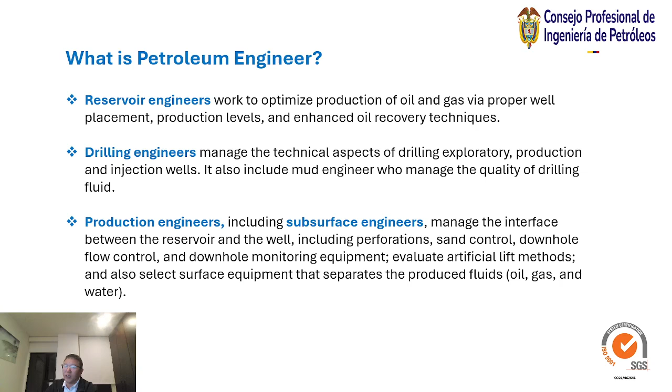So these four positions are very important for petroleum engineering: the geologist, the reservoir engineer, the drilling engineer, and the production engineer. All of this is the upstream sector for oil and gas finding, evaluation, drilling, production, and all of this.

So where does a petroleum engineer work? We can divide by employer: some people work for the government, some in oil companies, some in service companies, and support companies, and also in academia for research and others.

As for the location of these different people, some work in the office, some work on an onshore oil rig, some on an offshore oil rig, and on production platforms. We can say the field and offshore production platform. This is the location.

So what does petroleum mean? Petroleum literally means rock oil, the oil in the rock. The word comes from the Greek word petro, which means rock, and the Latin word oleum, which means oil. So we can say rock oil. And the word petro is a shortened version of petroleum. Petroleum products are all the substances made from petroleum.

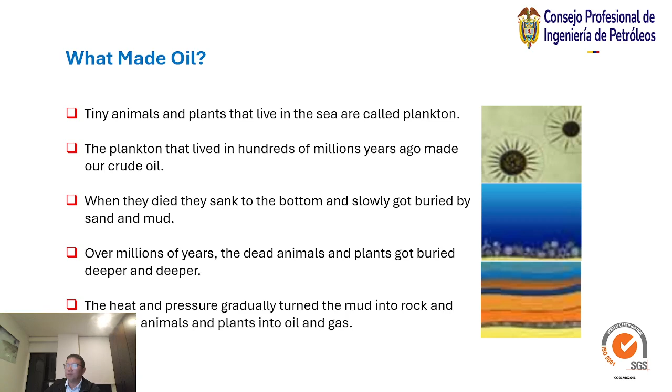So, what's the meaning of the hydrocarbons? Crude oil is a mixture of hydrocarbons. They are often chains of carbon atoms with hydrogens attached. The longer chains have higher boiling points, so they can be separated by distillation.

So what's the generation of the petroleum? Petroleum generation takes place in source rock. Remark: it takes place in source rock. The source rock may be defined as organic-rich, fine-grained sediments deposited under low-energy reducing conditions. And most commonly, petroleum source rock contains a minimum of 0.3 to 0.5% by weight of organic matter.

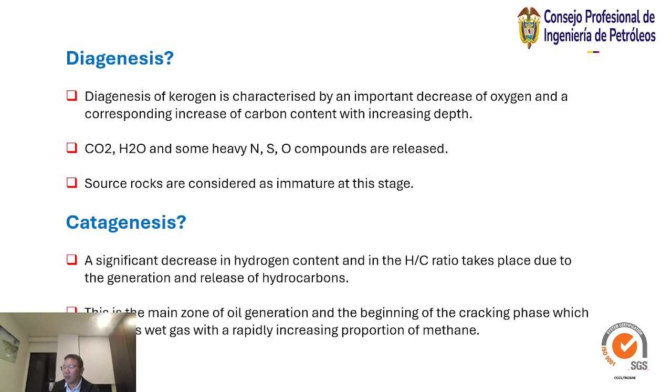The next stage is catagenesis. In catagenesis, a significant decrease in hydrogen content and in the H/C ratio takes place due to the generation and release of hydrocarbons. This is the main zone of oil generation and the beginning of the cracking phase, which produces wet gas with a rapidly increasing proportion of methane gas.

And the third stage is metagenesis. It begins at a temperature exceeding 175 degrees. During this stage, a rearrangement of aromatic sheets occurs, and the stacks of aromatic layers previously distributed at random in kerogen now gather to form larger clusters. At this stage, only dry gas is generated.

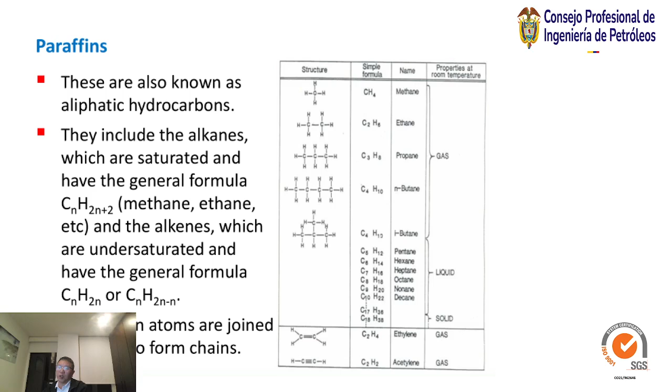The second is naphthenes. Naphthenes are also referred to as cycloparaffins and are characterized by their carbon atoms joined in such a way as to form a ring. Like this, form a ring. The heavier MW fraction of petroleum often contains quite complex naphthene molecules with two or more rings joined together.

The next one we talk about is the aromatics. The basic building block of these hydrocarbons is the benzene ring. The aromatic structure occurs especially in the high molecular weight fraction of petroleum.

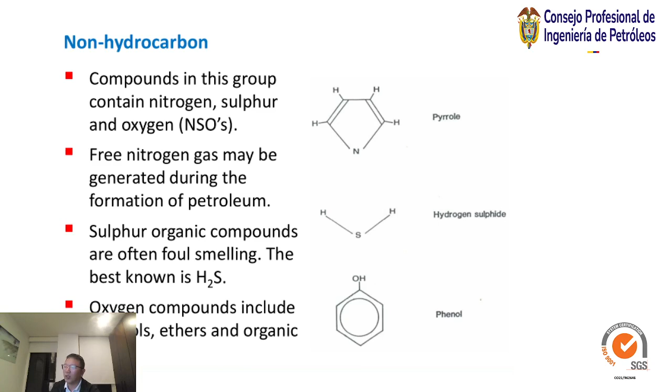And then we talk about the non-hydrocarbons. Compounds in this group contain nitrogen, sulfur, and oxygen. Free nitrogen gas may be generated during the formation of petroleum. Sulfur organic compounds often smell foul; the best known is H2S. And the oxygen compounds include alcohols, ethers, and organic acids.

Just now we talked about the four chemical compounds of petroleum. Then we talk about one very important process, fractional distillation. Fractional distillation splits the crude oil into simpler mixtures called fractions. The different fractions are taken out of the still at different levels. This happens in a distillation tower, which we shorten to still.

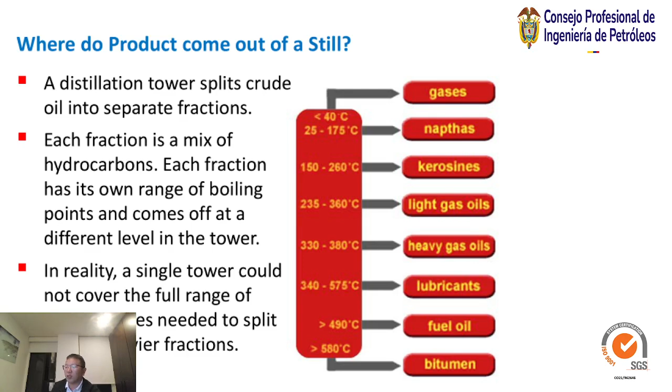So a distillation tower splits crude oil into separate fractions. Each fraction is a mix of hydrocarbons. Each fraction has its own range of boiling points and comes off at a different level in the tower. In reality, a single tower could not cover the full range of temperatures needed to split up the heavier fractions.

Then the naphtha is 5 to 10, and the boiling point is 25 to 175. It's blended into petrols and used as feedstock for making chemicals. And then the kerosene is carbon 10 to 16.

The boiling point 150 to 260 is the aviation fuel. And then the light gas oil is the 14 to 20. The boiling point is 235 to 360, for diesel fuel production. And then heavy gas oil is carbon 20 to 70. The boiling point 330 to 380 is the feedstock for the catalytic cracker.

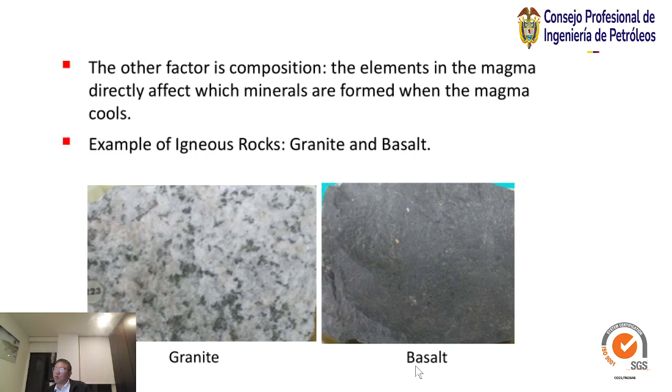So the second is sedimentary rock. Sedimentary rocks are called secondary because they are often the result of the accumulation of small pieces broken off pre-existing rock. This accumulation gets compacted and cemented together. There are three main types of sedimentary rocks: clastic, chemical, and organic sedimentary rock.

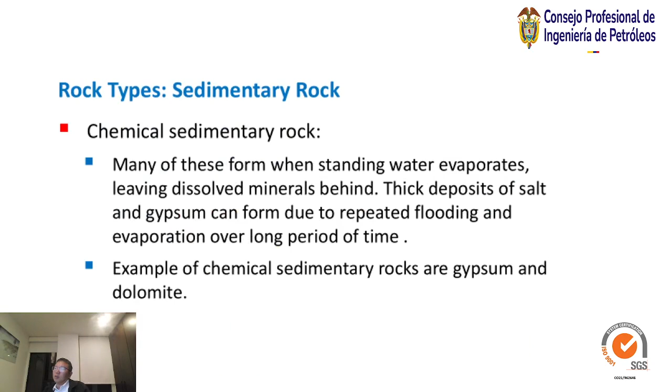The third type of sedimentary rock is organic sedimentary rock. It means any accumulation of sedimentary debris caused by organic process. Many animals use calcium for shells, bones, and teeth. This calcium can pile up on the sea floor and accumulate into a clastic layer to form an organic sedimentary rock. Examples of organic sedimentary rock are coal and coquina.

So the third type of rock is metamorphic rock. Metamorphic gets its name from 'meta' and 'morph.' Any rock can become a metamorphic rock. All that is required is for the rock to be moved into an environment in which the minerals that make up the rock become unstable and out of equilibrium with the new environmental conditions. In most cases, this involves burial, which leads to a rise in temperature and pressure.

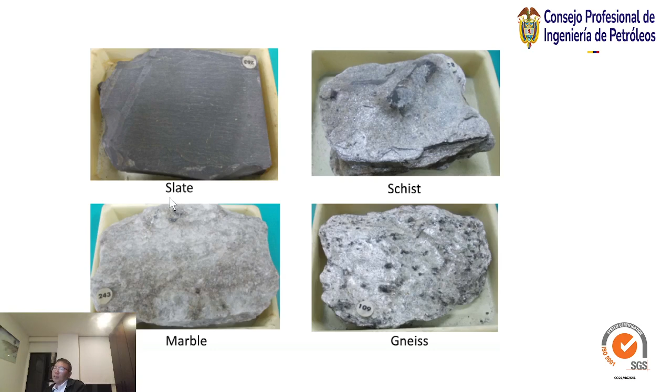The metamorphic changes into minerals always move in a direction designed to restore equilibrium. The common metamorphic rocks include slate, schist, gneiss, and marble. These are four photos showing examples: slate, schist, marble, and gneiss.

So just now we talked about different kinds of sedimentary rock. Now we talk about the parameters controlling petroleum occurrence, very important parameters. The first is source rock. The source rock is fine-grained sediment that, in its natural setting, has generated and released enough hydrocarbons to form a conventional accumulation of oil and gas. Source rocks are clay or carbonate, organic-rich marls deposited under low-energy reducing conditions. The most important factor in the generation of petroleum in source rock is temperature.

The action of heat on the insoluble organic matter, which we call kerogen content in source rocks, leads to the formation of oil and gas. So the source rock is very important.

The second is reservoir rock. The petroleum reservoir is a porous and permeable rock in combination with a natural source bed. Sandstone and carbonate rocks form the overwhelming majority of reservoirs worldwide. Under special circumstances, igneous and metamorphic rock can also act as petroleum reservoirs.

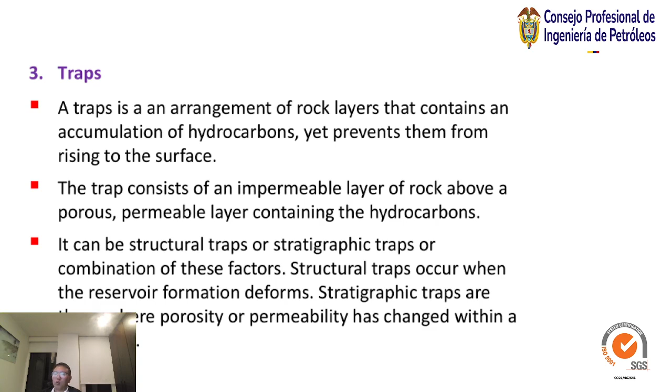So the migration of petroleum is also important. Oil and gas move out of the source beds and accumulate in the reservoir rocks. The transfer from source rock to reservoir rock is called primary migration. The movement of petroleum within porous and permeable reservoir beds is known as secondary migration.

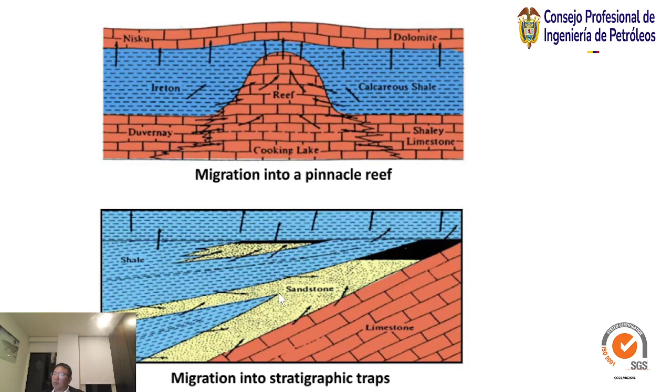Next we talk about the entrapment of petroleum. Oil, gas, and water slowly migrate through permeable rocks, driven by the natural force of gravity. We can see buoyancy and pressure gradients, two important factors: gravity and pressure. When they meet an impermeable barrier, they can go no further, so oil and gas accumulate. This barrier is generally referred to as a trap.

Varying density makes the gas phase rise, while the water sets to the lowest point and the oil remains in the middle, with gas on top. The traps may be classified according to the manner in which they are formed, categorized as structural trap, stratigraphic trap, and combination trap.

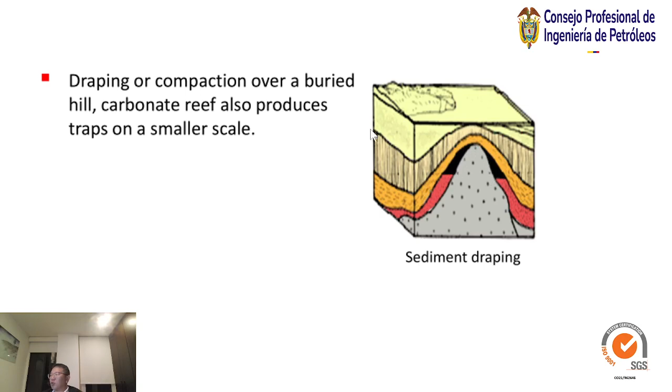The second type is stratigraphic traps. Most basins contain facies changes and unconformities which result in truncated beds, erosional or constructive surfaces such as reefs, hills, barriers, sandbars, channels, and other related geologic phenomena which form the basic requirements for the creation of stratigraphic traps. A stratigraphic trap is a generic term for traps that are chiefly the result of natural variation in the lithology of the reservoir rock, or a break in its continuity.

A permeable reservoir rock changes to a less permeable or impermeable rock. Two common types of stratigraphic traps are the pinch-out type and the truncated type.

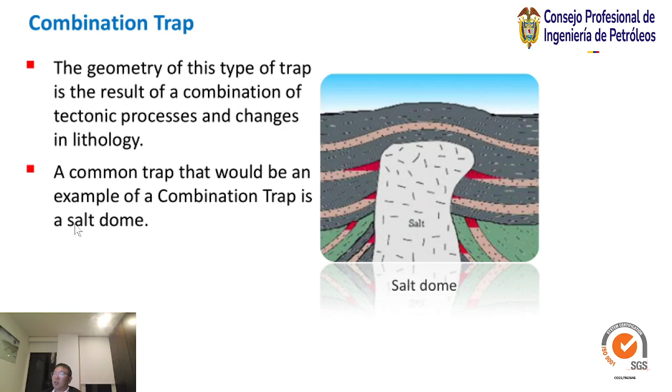A common trap that would be an example of a combination trap is a salt dome. This is very difficult to drill given this type of formation.

So just now we talked about the different types of traps. Continuing on, we talk about oil exploration methods - how to find the oil, where is the oil. In the earlier days of petroleum, most oil finds were the result of digging or drilling near known oil and gas seeps, or accidental finds while drilling for water.

In the earlier days, we found oil like this. A good definition of a seep is the surface expression of a migration pathway along which petroleum is currently flowing, driven by buoyancy from a subsurface origin. At the most basic level, this demonstrates that the basin contains a generating source rock, and hence a viable petroleum system - it means we have a viable petroleum system.

For surface geology, we use the remote sensing method. The selection of effective exploration targets is an important step to achieve success in oil exploration. Remote sensing refers to using infrared or other means to map a large area. This method is used to study the basics of petroleum geologic conditions, and the remote sensing imaging has the characteristic of reality, providing accurate visual data for directly determining the geometric shapes of sedimentary basins.

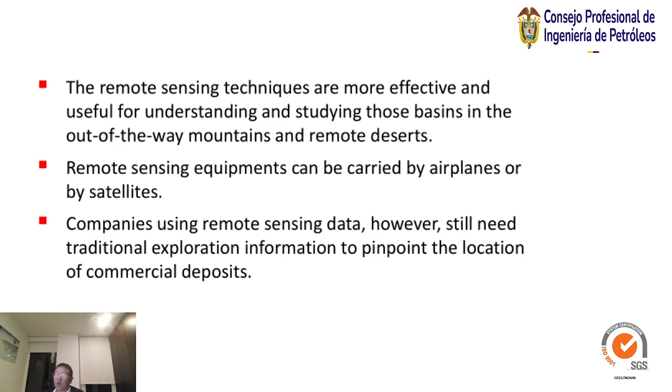So just now we were talking about surface geology. In earlier days it was from seep exploration, and then we use remote sensing data - we can use this to describe and map a big area. So now we talk about geophysical exploration.

The geophysical exploration - the first is magnetic methods. Sedimentary rock generally has a very small magnetic susceptibility compared with igneous or metamorphic rocks, which tend to have a much higher magnetite or common magnetic mineral content. So this is very important - sedimentary rocks generally have a small magnetic signature compared with others.

By conducting a magnetic survey over a given area, a prospector can determine where oil-bearing sedimentary rock is more likely to be found - we use this method to find oil-bearing sedimentary rock. The magnetometer is used for measuring the magnitude of the Earth's total magnetic field over a large area. It's one of the very important tools.

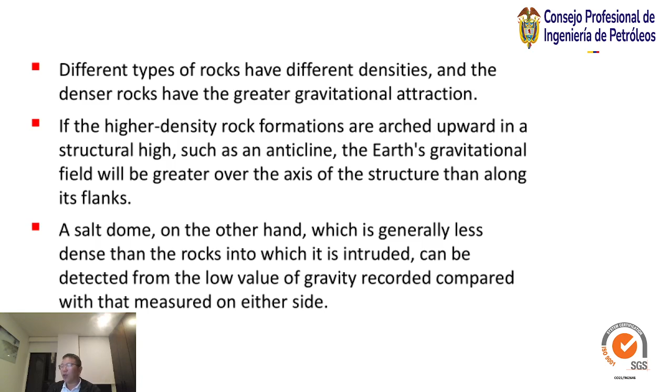In gravity prospecting, geophysics measures variations in the force of gravity from rocks up to a few miles beneath the Earth's surface. Different types of rock have different density, and denser rock has greater gravitational attraction. If higher density rock formations are arched upward in a structural high, such as an anticline, the Earth's gravitational field will be greater over the axis of the structure than along its flanks. Also, a salt dome, which is less dense than the rocks into which it is intruded, can be detected from a low value of gravity recording compared with measurements on either side.

So the third one is the seismic method. Seismic reflection, a powerful technique for underground exploration, has been used for over 60 years. It gives more precise details on the formation beneath the surface. The seismic waves are inertial sound waves that travel underground at velocities of 2 to 4 miles per second, meaning 3 to 6 kilometers per second, depending upon the type of rock through which they pass.

The reflections are recorded by detecting instruments responsive to ground motion, which we call geophones. They are aligned along the ground at a distance from the shot point, generally small compared with the depth of the reflector. According to the variations in reflection time from place to place on the surface, this usually indicates structural features in the strata below. From the geophones, the wave is sent through cables to a recorder.

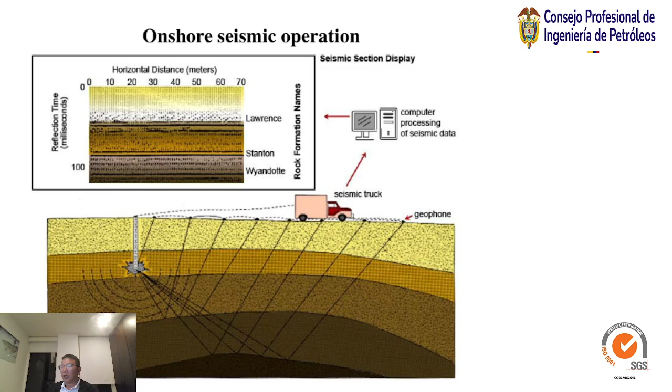This photo shows onshore seismic operations. We can see the seismic truck here, and the cable here, and then the wave. This wave travels in a zigzag pattern to get the information for the geophone, then it's transferred to the truck and then to the computer for processing of the seismic data. Using this, we can define different kinds of rock, and these photos of rock formations for different types give the image of these layers. So it's very useful to find oil and gas source rock.

Sample logs combined from well cuttings and cores are used to identify key depths and lithologic sequence. Core samples are taken from the top to the bottom of the well and show rock in sequential order as it appears in the ground. The core samples also provide information on porosity, permeability, and saturation of the rock in the well. Cuttings are not a continuous record like core samples, but provide a means for identifying sections with larger thick layers through fossil and mineral deposits.

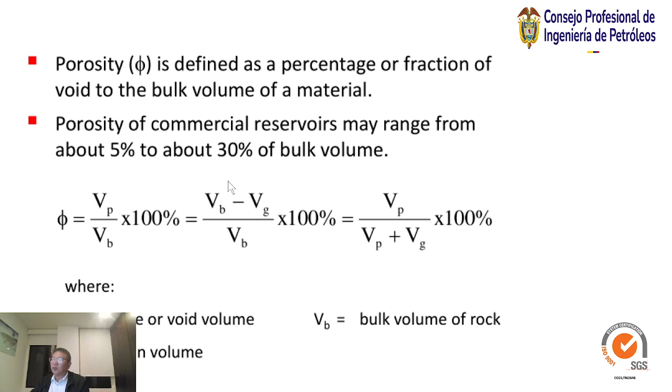This is the formula for how to calculate porosity, where we can see VP. VP is the pore volume. VG is the grain volume. VB is the bulk volume of the rock. So the porosity means VP to VB. Yeah. So VP equals VB minus VG. So we can say the porosity means VP to VB, or VB minus VG over VB. It's a percent. So we should be very familiar with this formula to calculate porosity.

And factors affecting porosity: many things can affect this. Here are the factors. The first is grain size. Grain size has no effect on porosity, where round sediments that are packed into the same array have porosity from 26% to 48% depending on the packing. The third is sorting. Well-sorted sediments generally have higher porosity than poorly sorted sediments for a simple reason: if a sediment has a range of particle sizes, then the smaller particles may fill in the voids between the larger particles.

And the grain shape. Irregularly shaped particles tend not to pack as tightly as round particles, resulting in higher proportions of void space. So here we also have total and effective porosity. Total porosity is defined as the ratio of the volume of all pores to the bulk volume of material, regardless of whether or not all the pores are interconnected. This is the total. Effective porosity is defined as the ratio of the interconnected pore volume to the bulk volume, so it's more important.

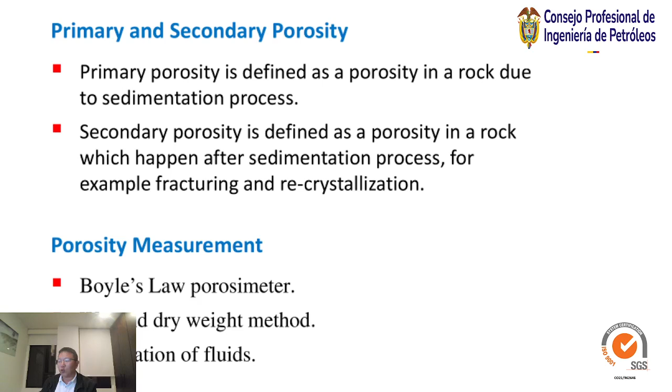So the permeability is a measure of the ability of a porous material to transmit fluid under a potential gradient. The unit of the permeability, K, is the Darcy, named after a French scientist, Henry Darcy, who investigated the flow of water through filter beds in 1856. One Darcy means 0.987 × 10^-12 square meters. This is the unit.

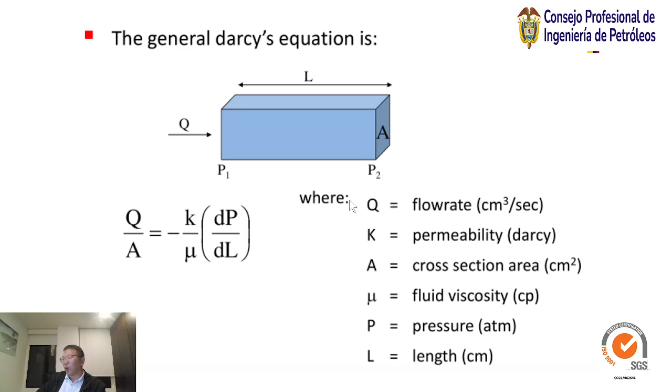So this is an example. From this we can find K. This is just a practice. The Q is like this, A is 1 square centimeter and mu is 1 cp, and like this we can calculate K. So 1 Darcy is defined as the permeability that permits a fluid of 1 centipoise viscosity to flow at the rate of 1 cubic centimeter per second through a cross-sectional area of 1 square centimeter when the pressure gradient is 1 atmosphere per centimeter. That is what 1 Darcy means.

So there are 4 conditions that are required for this equation to be valid. First is laminar flow type. Second, no accumulation. Third, single phase liquid fluid. And the porous medium is not reactive with the flowing fluid. A plot of Q over A against delta P over delta L should yield a single straight line, where the slope is K over mu, equal to the fluid mobility.

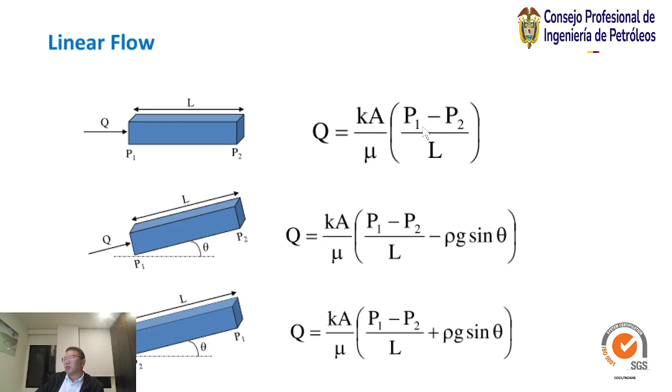So this is the linear flow. We can use different geometries to calculate the permeability. This one can serve as an exercise. We just talk about this one. This is the line, without the angle. Q equals K times A over mu times the pressure difference over L, and we can calculate K.

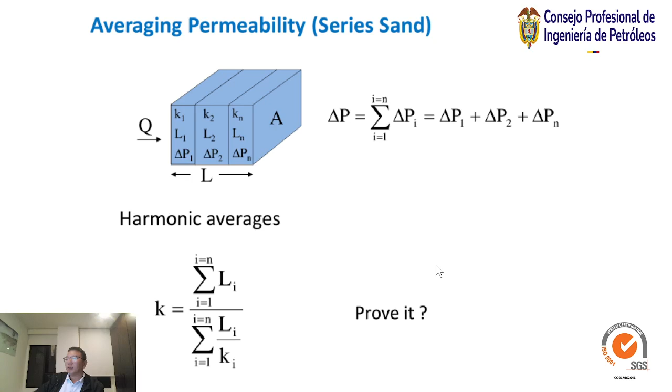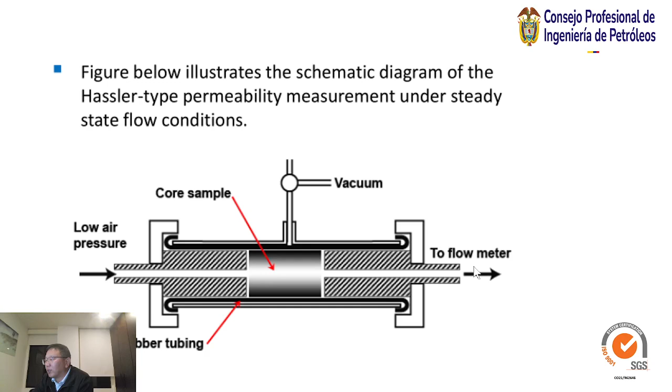The figure below illustrates the schematic diagram of the Hassler-type permeameter under steady state flow conditions. The pressure goes from here to here, through the core sample. This is the rubber tubing, this is the vacuum, and to the flow meter. The permeability is calculated using the following modified form of the Darcy equation, which takes into account the gas compressibility during flow.

And the slippage fraction during gas permeability measurement is like this. So including this, the gas permeability depends on the mean pressure of the gas existing at the time of measurement. At low mean gas pressure, gas permeability exceeds liquid permeability. At high mean gas pressure, gas permeability approaches liquid permeability. Slippage effect is a laboratory phenomenon due to low flowing gas pressure, but unlikely for gas flow at reservoir condition.

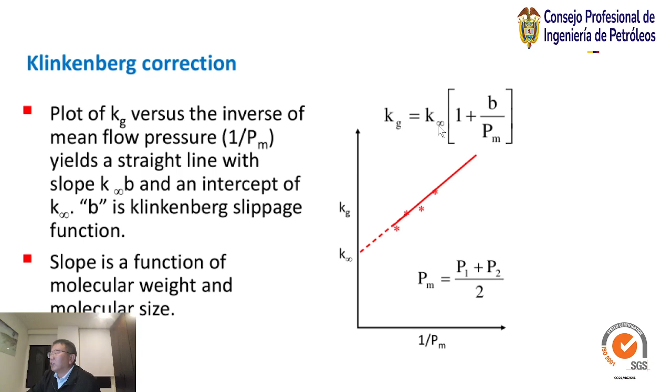Interfacial tension is very important. Interfacial tension is a force at the interface that acts to decrease the area of the interface. A drop of water can hang down from the edge of the glass tubing using the force at the interface. However, when the interfacial tension is weaker, only a smaller drop can hang on from the edge of the glass. The interfacial tension can be measured using this phenomenon.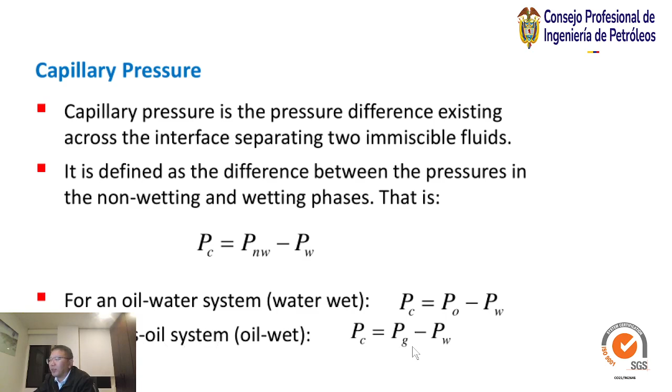The next one talks about the capillary pressure. The capillary pressure is the pressure difference exerted across the interface separating two immiscible fluids. It is defined as the difference between the pressures in the non-wetting and the wetting phase, that is Pc equals Pnw minus Pw. For an oil water system, water wet, Pc equals Po minus Pw. And for a gas oil system, Pc equals Pg minus Po.

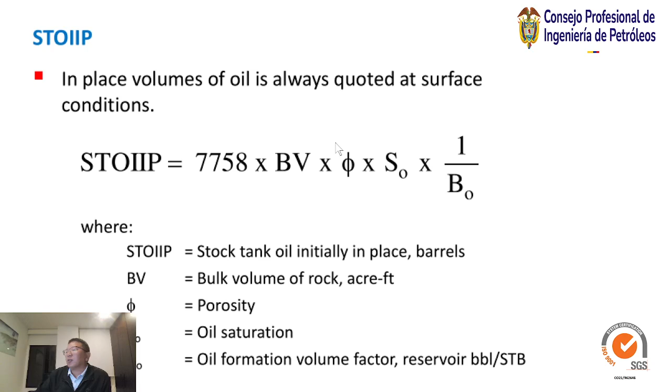So from this we can calculate the stock tank oil initially in place: 7758 times BV times phi times So, like this. We can calculate the stock tank oil initially in place. It's very important. So here we also have the exercise.

So we can calculate the stock tank oil initially in place. We can use this formula to calculate the barrels. So this one, no need. You can just do it after class as the exercise.

So we talk about the types of reservoir. The first is the oil reservoir. The oil reservoir contains mainly oil with or without free gas. It can be divided into two. An undersaturated oil reservoir has no free gas until the reservoir pressure falls below the bubble point pressure. In the saturated oil reservoir, free gas exists in the reservoir. So the next type is the gas reservoir.

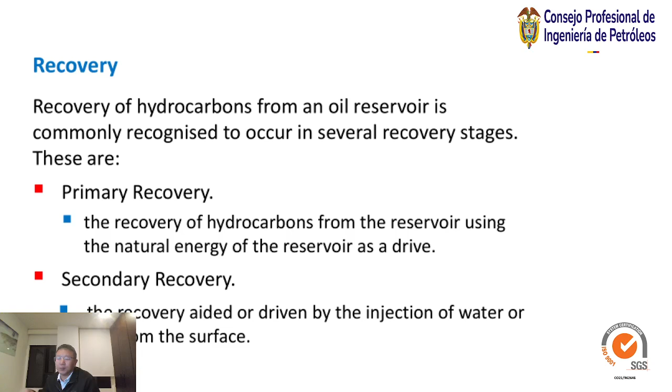Tertiary recovery is EOR, enhanced oil recovery. It means a range of techniques labeled enhanced oil recovery that are applied to the reservoir in order to improve flagging production. The infill recovery is carried out when recovery from the previous three phases has been completed. It involves drilling cheap production holes between existing boreholes to ensure that the whole reservoir has been fully depleted of its oil.

So next we're talking about the drive mechanism: the natural energy of the reservoir used to transport hydrocarbons towards and out of the production well. There are 5 important drive mechanisms or combinations: solution gas drive, gas cap drive, water drive, gravity drainage, and combined or mixed drive. A combined or mixed drive occurs when any of the first 3 drives operate together, or when any of the first 3 drives operate with the aid of gravity drainage.

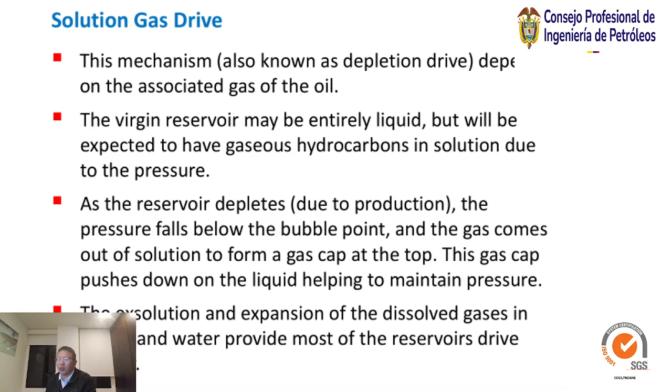So the water drive. The drive energy is provided by an aquifer that interfaces with oil in the reservoir at the oil-water contact, OWC. As the hydrocarbons deplete, production continues, and oil is extracted from the reservoir, the aquifer expands slightly. If the aquifer is large enough, this will translate into a large increase in volume, which will push up on the hydrocarbons and thus maintain the reservoir pressure.

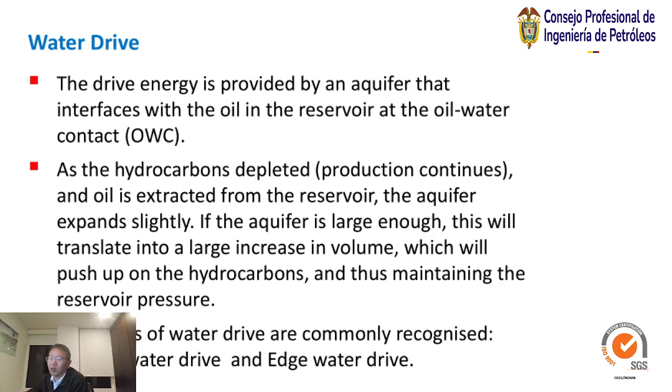And gravity drainage. Gravity drainage is the density difference between the oil, the gas and the water resulting in their natural segregation in the reservoir. This process can be used as a drive mechanism, but is relatively weak and in practice only used in combination with other drive mechanisms.

The secondary recovery. Secondary recovery is the result of human intervention in the reservoir to improve recovery when the natural drive has diminished to unreasonably low efficiency. Two techniques are commonly used. The first is water flooding, which involves injection of water at the base of the reservoir to maintain the reservoir pressure and displace oil towards production wells.

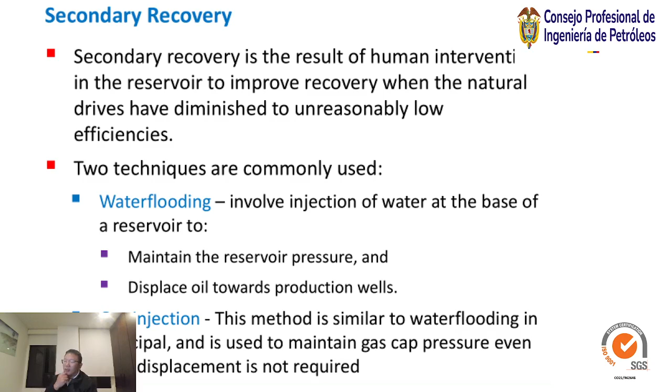And the tertiary recovery. Primary and secondary recovery methods usually only extract about 35% of the original oil in place. Clearly, it is extremely important to increase this figure. Many enhanced oil recovery methods have been designed to do this, and a few will be reviewed here.

They fall into three broad categories: thermal EOR, chemical EOR, and miscible gas. All are extremely expensive and are only used when economical. The first is thermal EOR.

This process uses heat to improve oil recovery by reducing the viscosity of heavy oil and vaporizing light oil, and hence improves their mobility. The techniques include steam injection, in-situ combustion, injection of hot gas that combusts with the oil in place, increasing the relative permeability to oil, and micellar and aqueous fluids. Thermal EOR is probably the most efficient EOR approach.

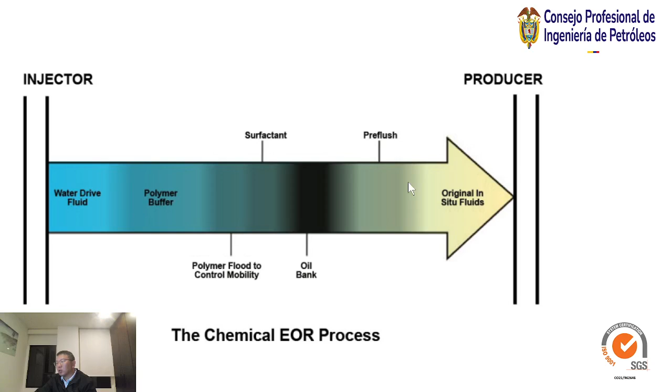The chemical EOR process. This is the injector. This is the production well, injection well. Inject the water drive fluid. Inject polymer buffer and polymer flood to control mobility, and surfactant and oil bank, pre-flush, original in-situ fluids, together to push the oil.

The miscible gas flooding. This method uses a fluid that is miscible with the oil. Such a fluid has zero interfacial tension with the oil and can in principle flush out all the oil remaining in place. In practice, a gas is used since gas has high mobility and can easily enter all the pores in the rock, providing the gas is miscible in the oil. Three types of gas are in common use: CO2, N2, and hydrocarbon gas.

So, this is talking about the rock and fluid properties. It is also very important for our engineers to know about the movement of the oil and the gas. So in this we talked first about the reservoir rock characteristics. We also talked about porosity and how to calculate porosity, how to measure and calculate permeability, and also the different types of rock and fluid interactions, the water, the surface interactions, and also the different types of reservoir and reservoir drive mechanisms, like water drive, and primary, secondary and tertiary recovery, with examples of the drive mechanisms.

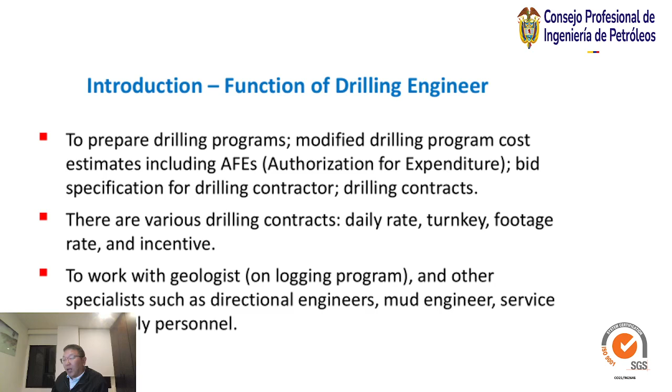So we can say the drilling engineer has at least three functions. First is technical, second is economic, third is safety and management. So it's very important.

The third one is marine or offshore rigs: the bottom supporting offshore rigs, submersible floating rig, and drill ship floating rig. Main design features are portability and maximum water depth of operation.

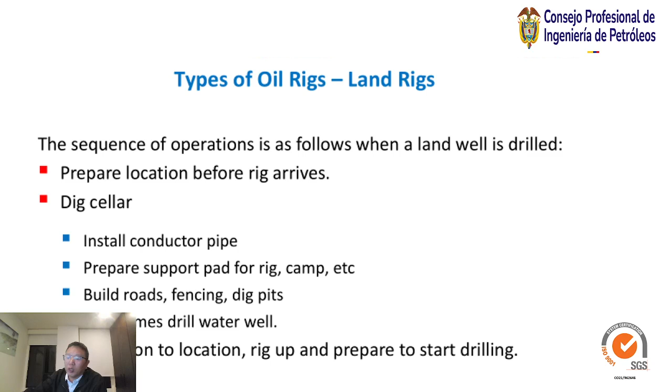So the offshore drilling rig has two main types: the floating and the bottom supported unit. The floating unit includes semi-submersible floater type, column stabilizers, barge rig, and drill ship. The bottom supporting unit includes submersible posted barge, bottle type submersible, arctic submersible, jackups, and platform.

So the semi-submersible. This floating drilling unit has ballast tanks flooded with sea water, causing the structure to submerge to a predetermined depth. Although it's moved by wave action, it sits with a large part of its structure in water, combined with huge mooring anchors, which makes it a very stable installation.

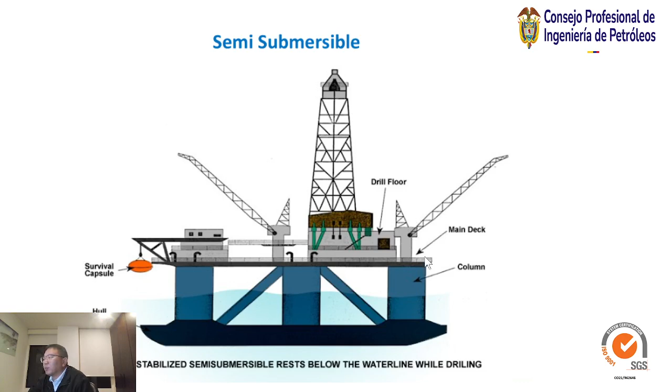The second is platform. This immobile structure can be built from concrete or steel or rested on the seabed. When oil and gas is located, a platform may be constructed to drill further wells at this site and also to produce the hydrocarbon.

And steel jacket platform: the most common type of platform, consisting of the jacket, a tall vertical section made of tubular steel members, supported by piles driven into the seabed. Additional sections on top of the jacket provide space for the drilling rig, crew quarters, and other equipment. This is the steel jacket platform.

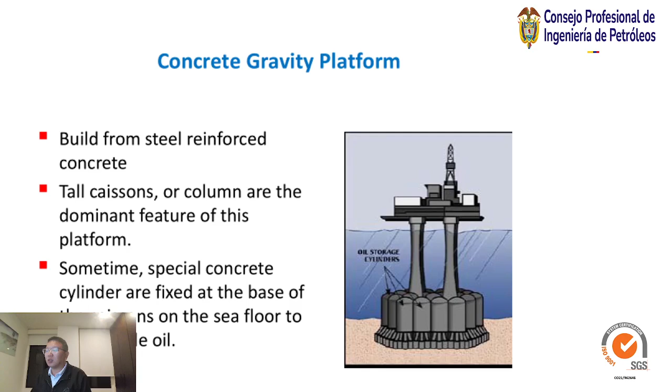Concrete gravity platform, built from steel reinforced concrete. Tall caissons, or columns, are the dominant feature of this platform. Sometimes special concrete cylinders are fixed at the base, adjacent to the sea floor, to store crude oil.

And steel caisson platform, specifically used in cold areas where faster moving tidal currents carry pack ice that can destroy the steel jacket. The caissons are made of two layers of thick steel to prevent ice damage.

Compliant platform is used instead of rigid platform in water much over 1,000 feet depth. It's not practical, very expensive to build as a rigid platform. In deep water, most companies use compliant platforms, which contain fewer steel parts and are lighter than rigid steel jacket: guyed tower platform and tension leg platform.

This is the compliant platform: it's the guyed tower platform. This is the tension leg platform.

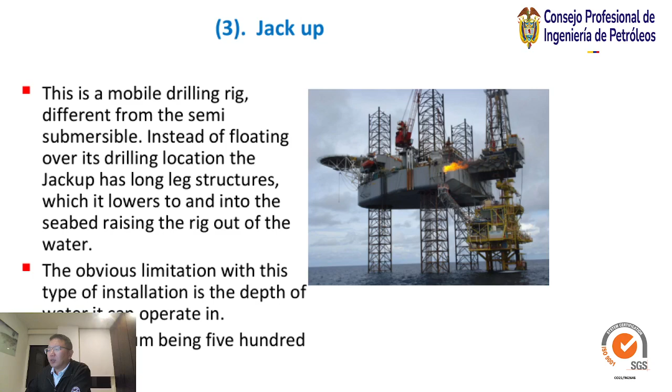The third one is jack-up. This is a mobile, modular drilling rig, different from the semi-submersible. Instead of floating over its drilling location, the jack-up has long leg structures which are lowered down into the seabed, raising the rig out of the water. The obvious limitation with this type of installation is the depth of water it can operate in, the maximum being 500 feet.

The drill ship: as the name suggests, this is a ship-shaped drill vessel. Unlike the semi-submersible and the jack-up, it doesn't require tugboats and towage to location. Although they are not as stable as semi-submersibles, they can also drill in very deep waters.

FPSO is floating production storage and offloading. They are attached to a seabed wellhead and produce and store oil until another tanker takes it from them. They are used to produce from small wells where it would be too expensive to build a platform.

Rotary drilling uses a sharp rotating drill bit to dig down through the earth's crust. The spin of the drill bit allows for penetration of even the hardest rock. The actual mechanisms of modern rigs are quite complicated, and technical advances come so rapidly that new innovations are being introduced consistently. A rotary drilling rig with some of its major components identified is illustrated in the next figure.

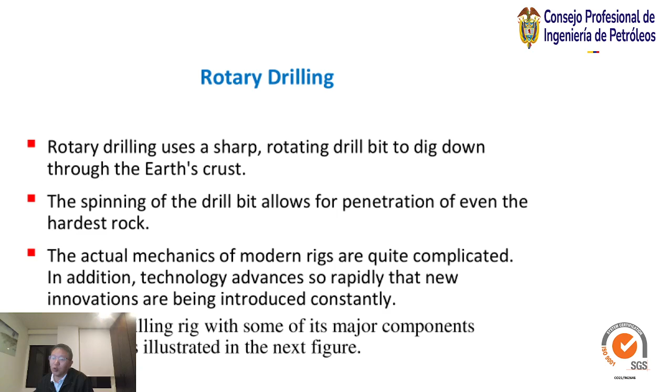The basic rotary drilling system has four groups of components: the prime movers, the hoisting equipment, the rotating equipment, and the circulating equipment.

For the prime movers: the prime movers in a rotary drilling rig are those pieces of equipment that provide the power for the entire rig. Diesel engines compose the majority of the power source on rotary rigs, though other types of engines are also in use. Some rotary rigs may use electricity directly from a power line.

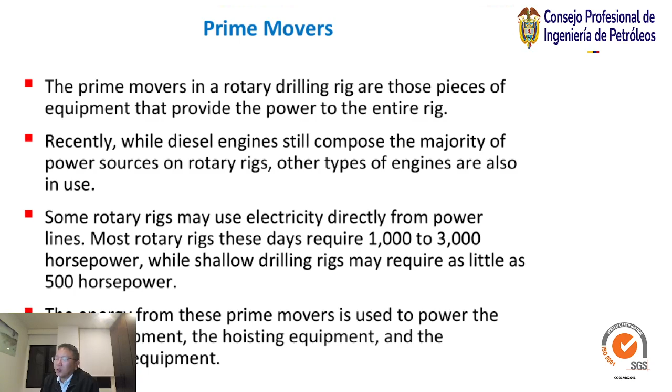Most rotary rigs require 1000 to 3000 horsepower, while shallow drilling rigs may require as little as 500 horsepower. The energy from these prime movers is used to power the rotary equipment, the hoisting equipment, and the circulating equipment.

The second is hoisting equipment. The hoisting equipment on a rotary rig consists of the tools used to raise and lower whatever equipment may go into or come out of the well. The most visible part of the hoisting equipment is the derrick, the tall tower-like structure that extends vertically from the well hole. The hoisting system is made up of the draw works, derrick, crown block, traveling block, hook, and wire rope.

If a drill bit needs to be changed, either due to wear or a change in the subsurface rock, the whole string of pipe must be raised to the surface. The hoisting equipment is used to raise all of this equipment to the surface so that the drill bit may be replaced.

So it includes the crown block, the drill line, the derrick, the fast line and the dead line, the traveling block, the hook, the draw works, the dead line anchor, and the storage reel.

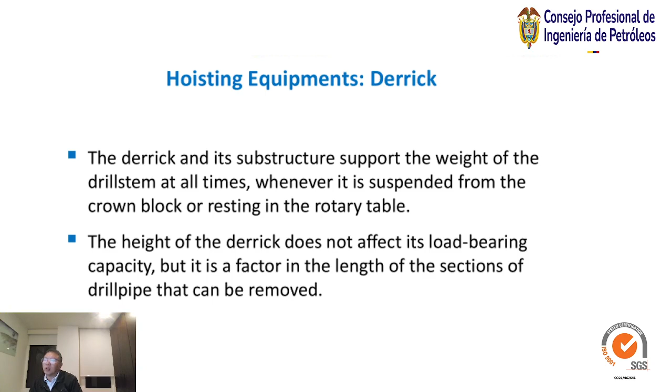The derrick and its substructure support the weight of the drill stem at all times. Whenever it's suspended from the crown block or resting on the rotary table, the height of the derrick doesn't affect its load-bearing capacity, but it is a factor in the length of the section of drill pipe that can be removed.

The traveling block, the crown block, the drill line, and the hook are all used to connect the supporting derrick with the load of drill pipe to be lowered into or withdrawn from the bore hole. During drilling operations, this load usually consists of the weight of the drill pipe, drill collars, and drill bits.

This is suspended from the traveling block under the standard drilling system. It's the hook which, when drilling, carries the swivel and the kelly, and when tripping, lifts the drill string.

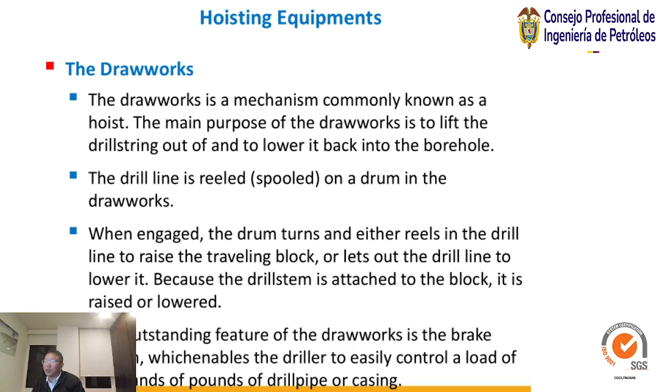When engaged, the drum turns and either reels in the drill line to raise the traveling block, or lets out the drill line to lower it, because the drill stem is attached to the block, it is raised and lowered. One outstanding feature of the draw works is the brake system, which enables the driller to easily control a load of thousands of pounds of drill pipe or casing.

An integral part of the draw works is the gears, the transmission system. This gives the driller a wide choice of speeds for hoisting the drill string.

The draw works also have a drive sprocket that drives the rotary table by means of a heavy drive chain. In some cases, however, the rotary table is driven by an independent engine or electric motor.

Another feature of the draw works are the two cat heads. The make-up cat head, on the driller's side, is used to spin up and tighten the drill pipe joints. The other, located opposite the driller's position on the draw works, is the break-out cat head. It's used to loosen the drill pipe when it is withdrawn from the borehole.

For the rotating equipment, this consists of the components that actually serve to rotate the drill bit. Rotating equipment from top to bottom consists of: swivel, a short piece of pipe called the kelly, rotary table, top drive, the drill string, and bit.

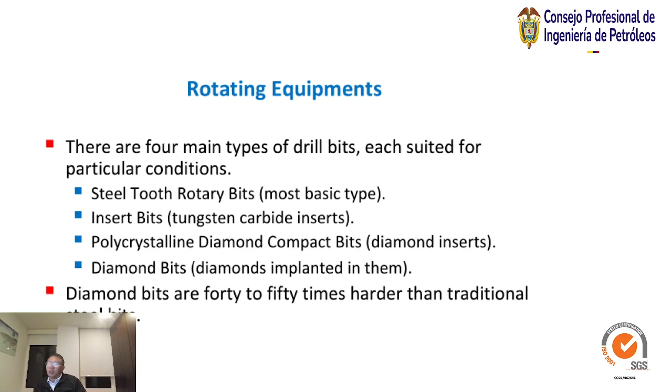The kelly goes through the kelly bushing, the kelly elevator, and the rotary table, and uses the force of rotation to transfer to the bit to drill the formation.

And the swivel hangs from the traveling hook by means of large bails or handles. The swivel does not rotate, but allows everything below it to rotate. The drilling fluid is introduced into the drill stem through a gooseneck connection on the swivel, which is connected to the rotary hose.

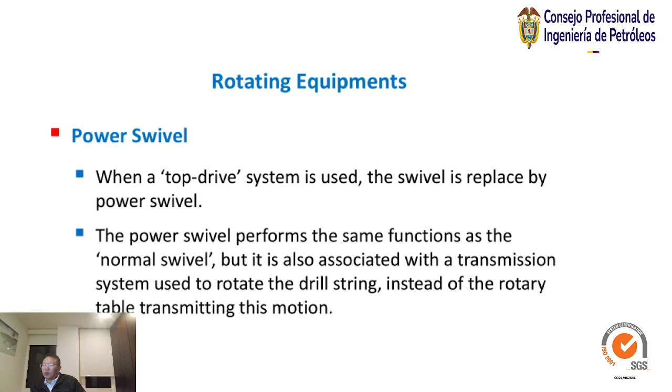The power swivel. When a top drive system is used, the swivel is replaced by a power swivel. The power swivel performs the same function as the normal swivel, but is also associated with the transmission system used to rotate the drill string, instead of the rotary table transmitting this motion.

And the kelly is approximately 50 feet long, square or hexagonal on the outside, and hollow throughout to provide the passageway for the drilling fluid.

Its outer surface engages the corresponding square or hexagonal surface in the kelly bushing. The kelly bushing fits into a part of the rotary table called the master bushing. Power gears in the rotary table rotate the master bushing and thus the kelly bushing. The kelly bushing will rotate the kelly and cause everything below it to rotate.

The drill string. The drill string is made up of the drill pipe, drill collar, and special subs through which the drilling fluid and the rotation power are transmitted from the surface to the bit. The drill pipe and the drill collar come in sections or joints about 30 feet long.

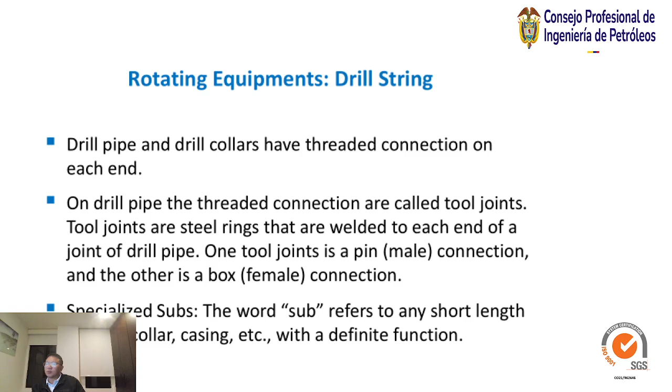Specialty subs: the word sub refers to any short length of pipe, collar, casing, and others with a definite function. The drill bit. At the bottom of a drill string is a bit which drills the formation rock. The most common types are roller cone bits and diamond bits.

The bit sizes range from 3-3/4 inch, or about 9.5 centimeters, to 26 inches in diameter. The most commonly used sizes are 17-1/2, 12-1/4, 7-7/8, and 6-1/4 inches.

The roller cone bits usually have 3 cone-shaped steel devices that are free to turn as the bit rotates. Several rows of teeth or cutters on each cone scrape, gouge, or crush the formation as the teeth roll over it. There are 2 types, milled teeth and tungsten carbide inserts.

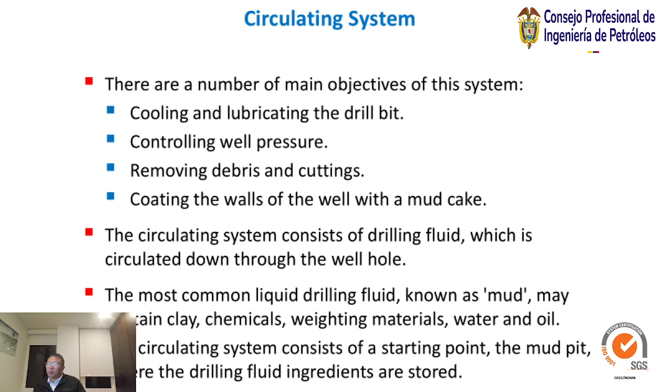The circulation system consists of the drilling fluid, which is circulated down through the wellbore. The most common liquid drilling fluid, known as mud, may contain clay, chemicals, weighting materials, water, and oil. The circulating system consists of a starting point, the mud pit, where the drilling fluid ingredients are stored.

The mixing takes place at the mud mix hopper, from which the fluid is forced through pumps up to the swivel and down all the way through the drill pipe, emerging through the drill bit itself.

From there, the drilling fluid circulates through the bit, picking up debris and drill cuttings to be circulated back up the well, traveling between the drill string and the walls of the well, also called the annular space. Once reaching the surface, the drilling fluid is filtered to recover the reusable fluid. This is the circulating system.

We can say, the fluid goes from the mud pump and is transferred through the pipeline to the hose and to the swivel, and then to the kelly and to the drill pipe, and to the bottom of the drill bit,

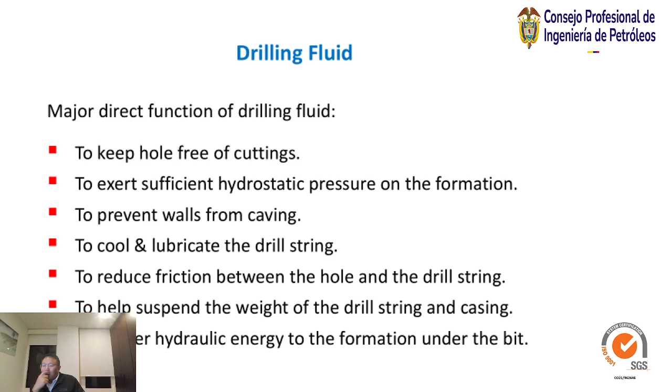to reduce friction between the hole and the drill string, to help suspend the weight of the drill string and the casing, and to deliver hydraulic energy to the formation under the bit.

One critical function of the drilling fluid: when formation pressure is more than hydrostatic pressure, a kick occurs. An uncontrollable kick may cause a catastrophic blowout, perhaps the worst disaster during drilling operations.

The effects of the blowout are loss of life, loss of drilling equipment including the rig, loss of the well, loss of the oil and gas reservoir, and damage to the environment. So the blowout is the heaviest incident for the drilling operation.

For well control, drilling fluid provides the first line of defense against blowout. A hole full of mud with the right weight and proper density will not blow out, but sometimes a kick occurs. The second line of defense against blowout is the blowout preventer (BOP). When closed, they form a pressure-tight seal at the top of the well and prevent the escape of fluid.

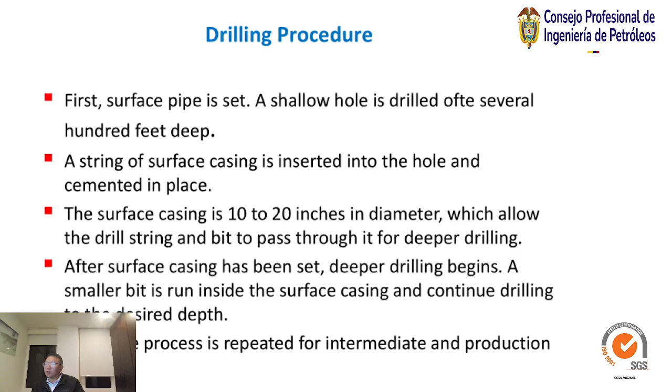After surface casing has been set, the deeper drilling begins. A smaller bit is run inside the surface casing and continues drilling to the desired depth. The same process is repeated for the intermediate and production casing.

The casing accessories include the centralizer. The centralizer is to keep the casing in the center of the hole so that the cement distributes evenly around the outside of the casing. And the scratchers help remove wall cake so that the cement can form a better bond.

And the casing shoe or guide shoe fits onto the end of the last joint. It prevents the casing from snagging on irregularities in the borehole as it is lowered. And the float collar, a special coupling used one or two joints above the guide shoe, contains a one-way valve which prevents drilling mud from entering the casing and also prevents cement from flowing up the casing.

Cementing the casing. The cement used in oil well cementing is Portland cement. It usually contains special additives to make it suitable for cementing a particular well. For example, a retarder is required to slow down the setting time of the cement. The cementing crew mixes the dry cement with water to form cement slurry.

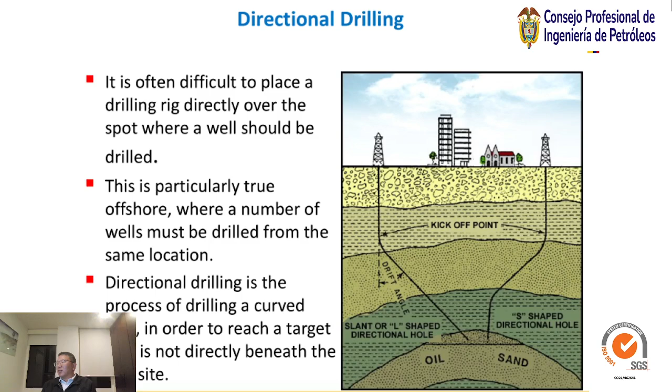Directional drilling. The calculations for directional drilling have become more sophisticated. The earlier method used was the whipstock, which involves placing a wedge. We use the whipstock, a wedge-shaped piece of steel at the bottom of the hole, to force the bit to the desired angle. A more recent development in directional drilling has been the use of the downhole motor.

The drilling problems: stuck pipe, lost circulation, borehole instability, mobile formation, undergauge hole, kicks and blowout. The first is stuck pipe or pipe sticking. The definition is when part of the drill pipe or collars are stuck in the hole. If pipe cannot be rotated or pulled and circulation is good, then the pipe is probably wall stuck.

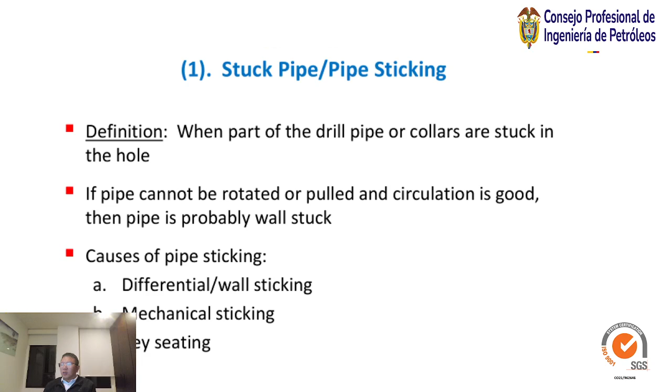The causes of pipe sticking: the first is differential wall sticking. The second is mechanical sticking. The third is key seating. For differential or wall sticking, differential is the pressure difference around the circumference of the drill collar or pipe.

Wall sticking is caused when the pipe is held by a suction force resulting from overbalanced hydrostatic pressure forcing filtrate into a permeable zone, which leaves a thick mud cake on the wall of the hole. Also, porous and permeable formations, and also motionless drill strings.

Second is mechanical sticking. A drill pipe can be stuck mechanically when cuttings and sloughing formations pack off the annular space around the drill string, especially during a pump shutdown period, and drilling through several layers of formation of different hardness, and junk dropped from the surface. The drill string is run too fast until it hits a bridge, a tight spot, or the hole bottom. All this can cause mechanical sticking.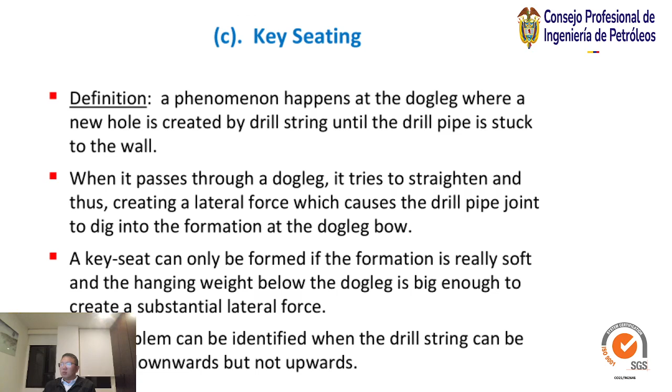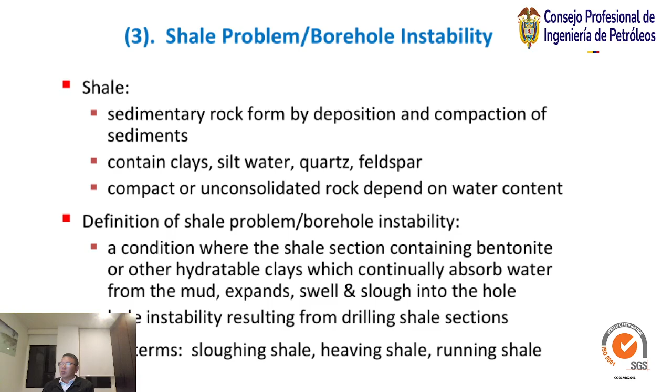How to prevent sloughing shales? Use a suitable mud system to inhibit hydration, such as high K content mud, OBM, and oil emulsion, to decrease the tendency of the mud to hydrate water-sensitive clays. Second, increase the circulation rate to more rapidly remove the particles. The third one is to increase mud density for greater wall support,

and also decrease the water loss of the mud, avoid fast trips or swabbing of the hole, and keep flow properties and annular velocities at such a level as to ensure good hole cleaning.

The fourth type is the mobile formation. Salt or shale can squeeze into the wellbore because it's being compressed by the overburden force. The deformation results in a decrease in wellbore size, causing problems running BHAs, logging tools, and casing, and stuck pipe. The deformation occurs because the mud weight is not sufficient to prevent the formation squeezing into the wellbore. And once broken, the hole will become enlarged.

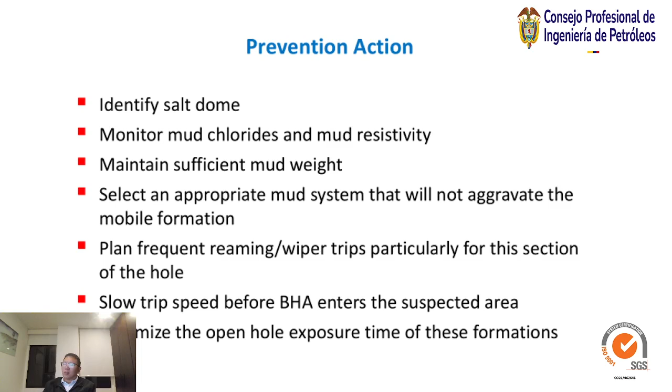The fifth is the undergauge hole. When drilling hard abrasive rock, the bit and the stabilizers wear undergauge and result in a smaller than gauge hole. When a subsequent in-gauge bit is run, it encounters resistance due to the undergauge section of the hole. And if the string is run into the hole quickly without reaming, the bit can jam in the undergauge

hole section. This mechanism normally occurs after running a new bit, after coring, when a PDC bit is run after a roller cone bit, and also when drilling abrasive formations.

The sixth is kick and blowout. A kick means an entry of formation fluid, gas, oil, or water, into the wellbore during drilling. A blowout is the uncontrolled flow of formation fluid, gas, oil, or water, from the wellbore. Kicks and blowouts can occur when the hydrostatic pressure of the mud is lower than the formation pressure, causing the formation fluid to flow out of the bore.

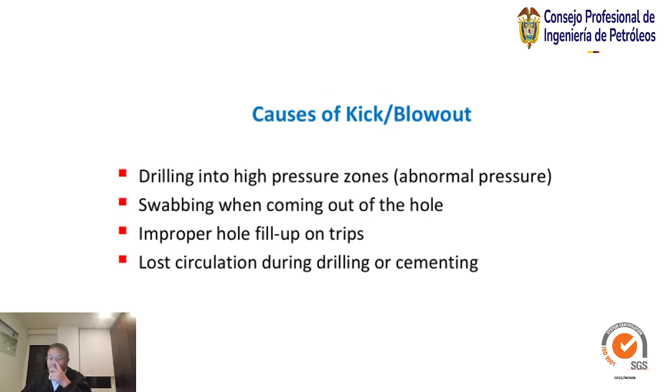So, in this we talked about the drilling operation. Later we will show a video about the whole drilling process to make the operation clearer. Now, from the video we can become more familiar with drilling hole operations.

Geologists and geophysicists have agreed on the existence of a prospect, a potential field. In order to find out if hydrocarbons are indeed trapped in the reservoir rock, we must drill to hit them. Bearing in mind the knowledge acquired about the substratum and the topography of the land, the best position for the installation of the drilling equipment is determined. Generally, it is vertically above the point of maximum thickness of the geological layer suspected of containing hydrocarbons.

The drillers then make a hole in conditions that are sometimes difficult. Of small diameter, from 20 to 50 centimeters, this hole will generally go down to a depth of between 2,000 and 4,000 meters. Exceptionally, certain wells exceed 6,000 meters. One of them has even exceeded 11,000 meters. Certain fields can be buried at a depth equivalent to the height of 12 Eiffel Towers.

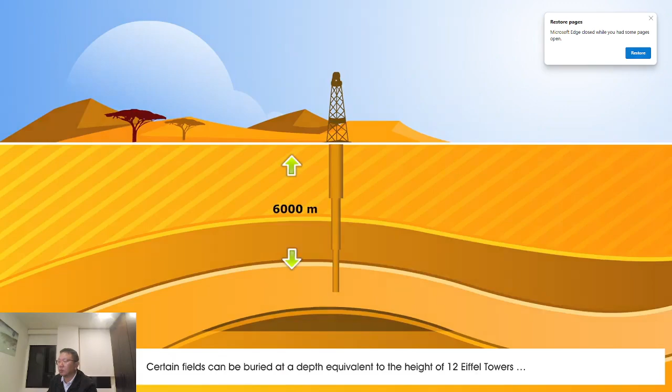The derrick is the visible part of the drilling rig. It's a metal tower several tens of meters high. It's used to vertically introduce the drill strings down the hole. These drill strings are made up of metallic tubes screwed end to end. They transmit a rotating movement, rotary drilling, to the drilling tool, the drill bit, and help circulate a liquid called mud, because of its appearance, down to the bottom of the well.

The drilling rig works like an enormous electric hand drill, of which the derrick would be the body, the drill strings the drive, and the drilling tool the drill bit. The most usual tool is an assembly of 3 cones, from which comes the name tricone, in very hard steel, which crushes the rock. Sometimes, when the rock being drilled is very resistant, a single block tool encrusted with diamonds is used. This wears down the rock by abrasion.

Through the drill pipes, at the extremity of which the drill bit rotates, a special mud is injected, which the mud engineer prepares and controls. This mud cools the drill bit and consolidates the sides of the borehole. Moreover, it avoids a gushing of oil, gas or water from the layer being drilled by equilibrating the pressure. Finally, the mud cleans the bottom of the well.

As it makes its way along the pipes, it carries the rock fragments, cuttings, to the surface. The geologist examines these cuttings to discover the characteristics of the rocks being drilled and to detect eventual shows of hydrocarbons. The cuttings, fragments of rock crushed by the drill bit, are brought back up to the surface by the mud.

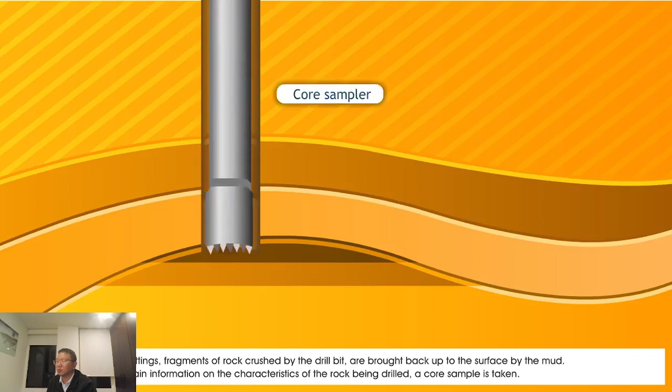To obtain information on the characteristics of the rock being drilled, a core sample is taken. The drill bit is replaced by a hollow tool called a core sampler, which extracts a cylindrical sample of several meters of rock. This core supplies data on the nature of the rock, the inclination of the layers, the structure, permeability, porosity, fluid content, and the fossils present.

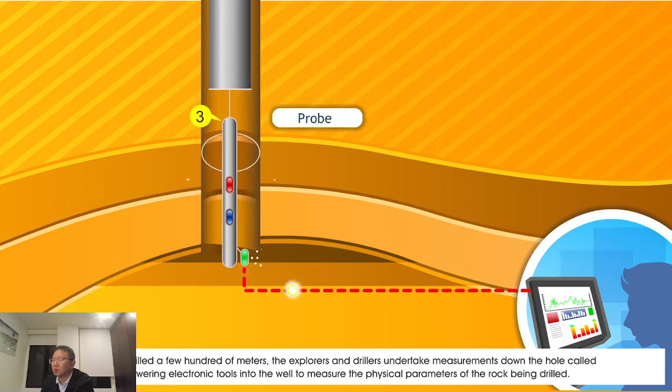After having drilled a few hundred meters, the explorers and drillers undertake measurements called loggings down the hole by lowering electronic tools into the well to measure the physical parameters of the rock being drilled. These measures validate or invalidate or make more precise the hypotheses put forward earlier about the rocks and the fluids that they contain. The log engineer is responsible for the analysis of the results of the various loggings.

The sides of the well are then reinforced by steel tubes screwed end to end. These tubes, called casings, are cemented into the ground. They isolate the various layers encountered.

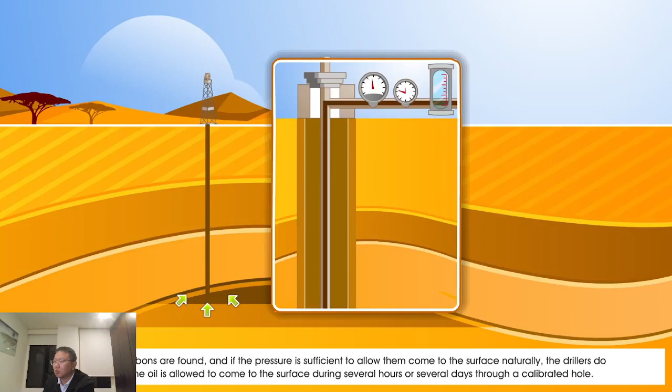When hydrocarbons are found, and if the pressure is sufficient to allow them to come to the surface naturally, the drillers do a flow check. The oil is allowed to come to the surface during several hours or several days through a calibrated hole. The quantity recovered is measured, as are the changes in pressure at the bottom of the well. In this way, a little more knowledge is gained about the probable productivity of the field.

If the field seems promising, the exploration team ends the first discovery well and goes on to drill a second, even several others, several hundred or 1,000 meters further away. In this way, the exploration team is able to refine its knowledge about the characteristics of the field. The decision to stop drilling is made only when all these appraisal wells have provided sufficient information either to give up the exploration or to envisage future production.

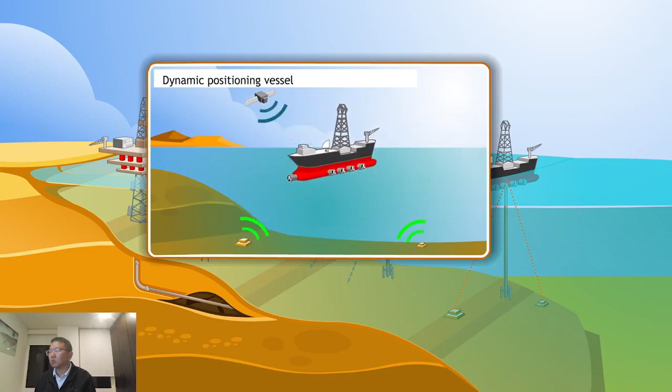With directional drilling, the wellbore can be steered at different angles. We use advanced technologies like downhole motors and steerable drill bits, which are designed to change the direction of the wellbore in real time while drilling.

These tools are equipped with sensors that send data back to the surface, allowing drillers to make precise adjustments, guiding the well towards its target. Think of it like driving a remote-controlled car underground, but way more complex. But what is the path that will be followed to reach the target? Let's talk about well profiles.

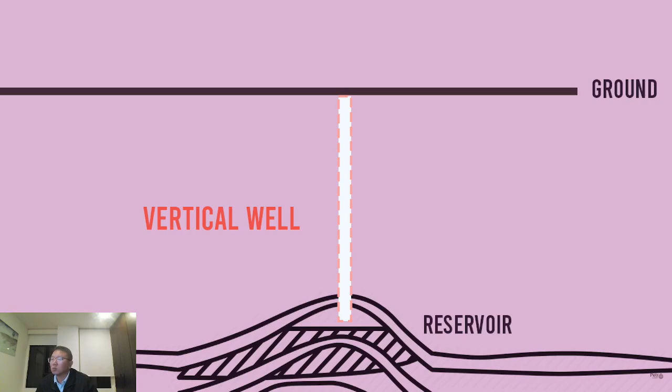First, what exactly is a well profile? In simple terms, it is the path a well takes from the surface to the reservoir. Let's start with the vertical well, the simplest and most traditional profile. It is drilled straight down with no deviation. Vertical wells are still widely used when the target reservoir is directly below the drilling site.

Next, we have the build and hold profile, also known as the J profile. In this design, the well starts vertically, then gradually builds an angle until it reaches the desired inclination, and it holds that angle until it penetrates the reservoir. This profile is used when the target reservoir is not directly below the drill site. It is common in offshore drilling, where we need to reach reservoirs located miles away from the platform.

Up next is the S profile. Like the J profile, the well starts vertically and builds an angle, but here is the twist. It drops back down to a more vertical angle near the bottom. This profile is ideal for reaching deeper reservoirs that are horizontally offset but at a different depth, making it a bit more versatile than the J profile.

Now for the horizontal wells, which is one of the most powerful applications of directional drilling. Once the drill bit reaches a certain depth, it curves and drills horizontally through the reservoir. This method is especially useful for shale formations and tight oil reservoirs, where the oil and gas are trapped in narrow layers of rock. By drilling horizontally, we expose much more of the wellbore to the oil-rich rock, significantly increasing production rates.

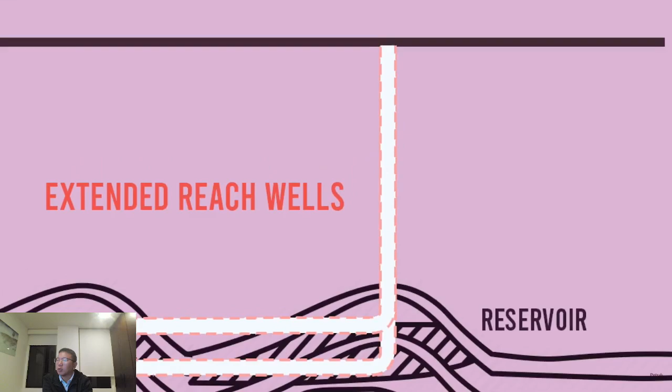Next is the multilateral well. This advanced profile has a main wellbore with multiple branches extending into different sections of the reservoir. Multilateral wells are ideal for maximizing production from a single well by tapping into various parts of the reservoir at once.

Lastly, let's talk about sidetracked wells. Sometimes things don't go as planned. Maybe there is an issue like a stuck pipe, or we need to access a different part of the reservoir. That's when we drill a secondary wellbore off the original, known as a sidetrack, to bypass the problem or hit a new target.

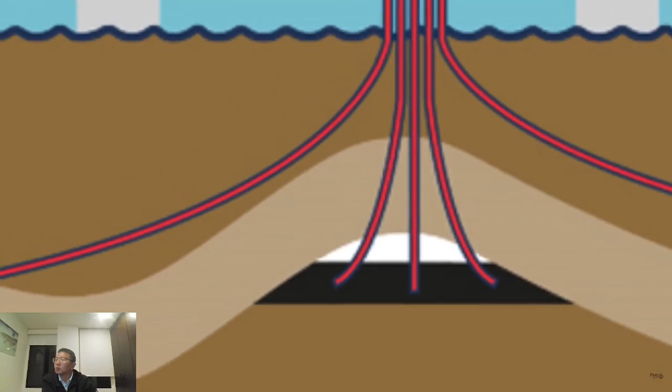So, why use directional drilling? One key benefit is increased access to oil and gas reservoirs that were previously unreachable with traditional methods. It also reduces the number of drilling sites needed, which means less surface disturbance and a smaller environmental footprint. In fact, with just one rig, we can drill multiple wells radiating outwards, making it more efficient and cost-effective. This makes directional drilling particularly useful in urban areas or environmentally sensitive regions where surface drilling is limited.

Of course, directional drilling is not without its challenges. Maintaining wellbore stability while drilling at different angles can be tricky, and downhole equipment needs to be extremely durable to withstand high pressures and temperatures. But with advancements in automation and AI-driven drilling technologies, the future of directional drilling looks bright. So that's a quick look at how directional drilling is revolutionizing the oil and gas industry. It is efficient, cost-effective, and helps us unlock oil and gas reserves that were once out of reach.